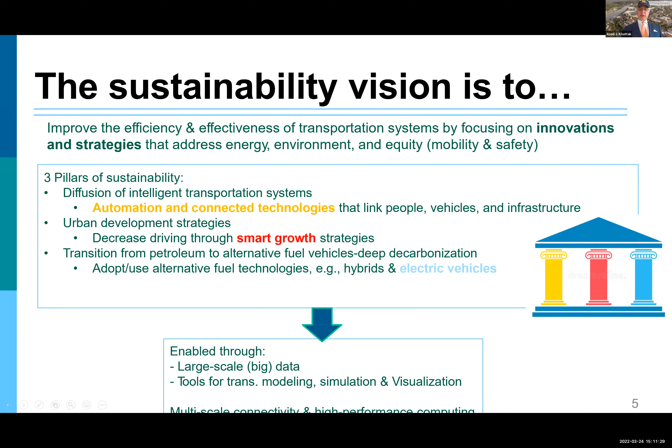This whole thing, the good part and the optimism part, is that we are able to now achieve some of our aims through large-scale big data, transfer of that data in very fast environments, and also through tools that are being developed for transportation modeling, simulation, and visualization.

So that's the good part, where I think we can rely on some of the new tools being developed, especially AI. This gives you the societal context and opportunities. Safety is a huge issue: about $8 trillion in 10 years would be the economic and social costs of harm from crashes, wastage of fuel and congestion, and fatalities. There are so many of them worldwide, about 1.2 million people die every year.

These are huge costs that society pays, from congestion and its economic costs, all turning out to be in the trillions of dollars. But at the same time, the opportunities are to improve our supply chain efficiency, improve mobility through innovative strategies, as well as enhance safety, better air quality, and enhance economic development.

The transportation system of the future — there's one concept of smart cities, which has been around for a while. This is the overarching idea where you integrate automation and connectivity of vehicles, but also bring in electrification and freight efficiencies, as well as commute and travel efficiencies. This is enabled by computational power, ubiquity of ambient sensors, big data, and artificial intelligence. We'll talk about that a little more.

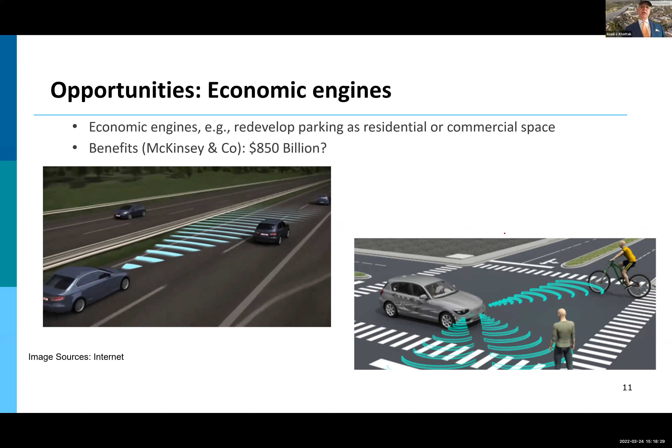The first one is that of CAVs, based on some of the reports I've read from McKinsey and Company. There are economic engines that can drive these innovations into the system, but is our system ready to receive these? That's the question. But the benefits of these have been estimated at 850 billion per year once these systems start to diffuse more and more into our system.

As you probably know, there are 5 levels of automation that SAE has given us, increasingly getting the car to drive itself. But we are usually talking about these systems in the commercial market, and levels 3, 4, and 5 are very high-level systems being tested, but not available at the moment, even though some car companies claim they have an autopilot that seems like level 3 or 4, where pretty much the car is driving itself.

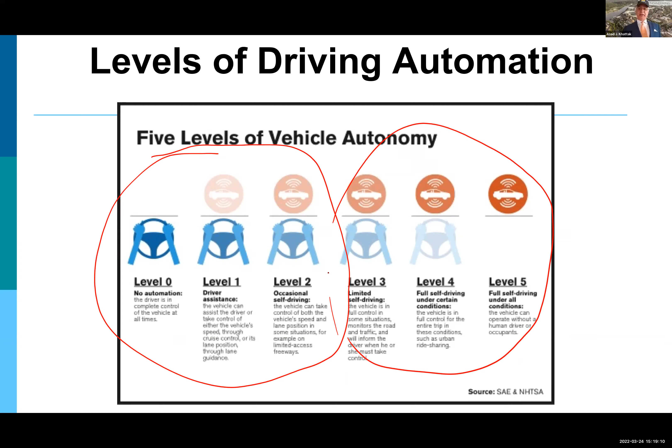One other important thing I want to mention is this degree of autonomy and cooperation. These are two things. You can have an autonomous unmanned military vehicle which doesn't talk to anything, and in a desert or jungle it can keep on navigating.

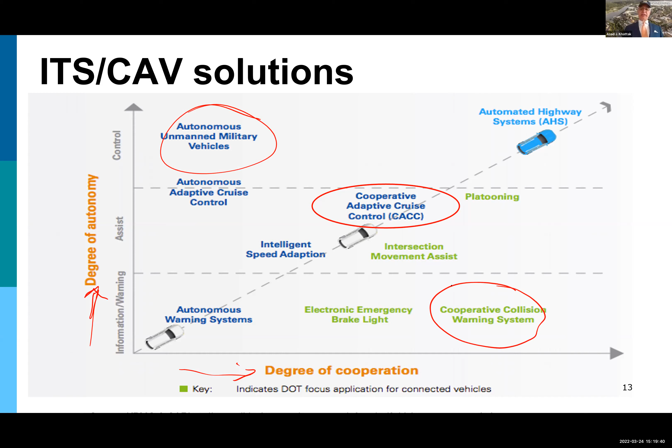But on the other hand, there are cooperative systems where you have the collision warning system and so on, all the way to automated highway systems, which were worked on in the 90s by various companies as well as universities. There was a demo in San Diego where they demonstrated the usefulness of them, but to implement them takes many more years.

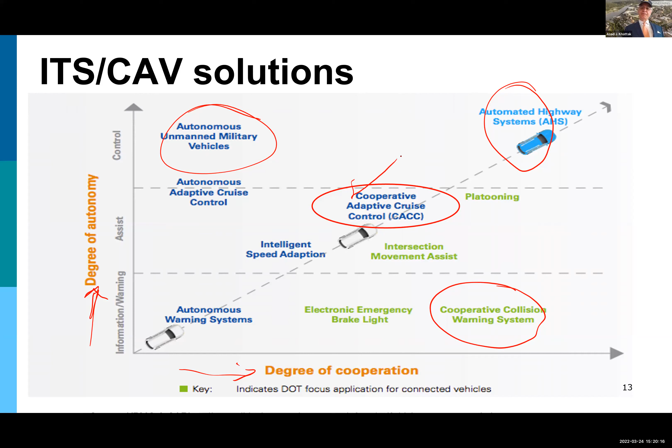So what I'll try to do is talk about maybe something in between, which is being tested and is closer to implementation. So in order to proceed, I wanted to mention this idea of driving volatility, which is kind of an overarching concept.

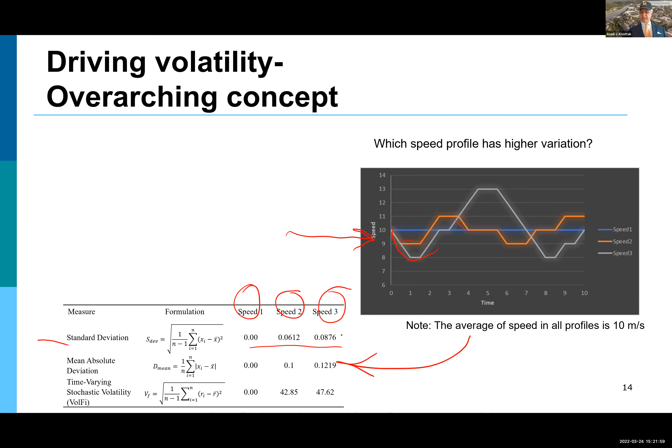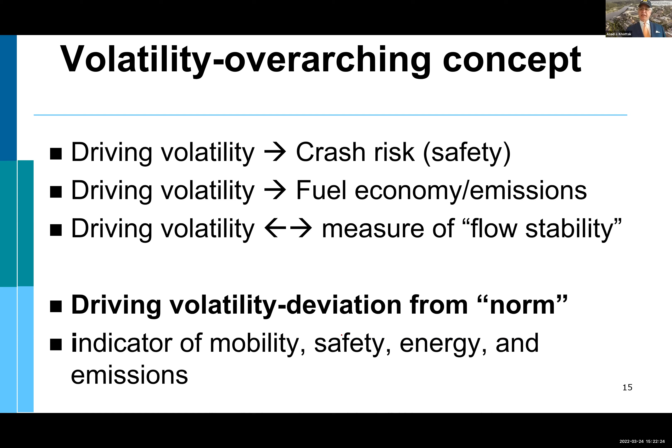So volatility also captures crash risk, like safety, but also it can capture fuel economy. If you are accelerating hard and braking hard, that means more fuel consumption. And also it can be a measure of flow stability. So it's basically deviation from the norm, and it's an indicator of mobility, safety, energy and emissions, some of the key criteria. I'll come back to this in just a little bit to show you some results.

And then rear automatic braking, where if you're reversing and so on, it is able to brake. In addition, rear view cameras are already reducing backing crashes. This is an important aspect - this is already happening in the system, and we are seeing insurance claims being used, and insurance rates for cars with these systems are lower. So this is clear evidence that these systems are effective.

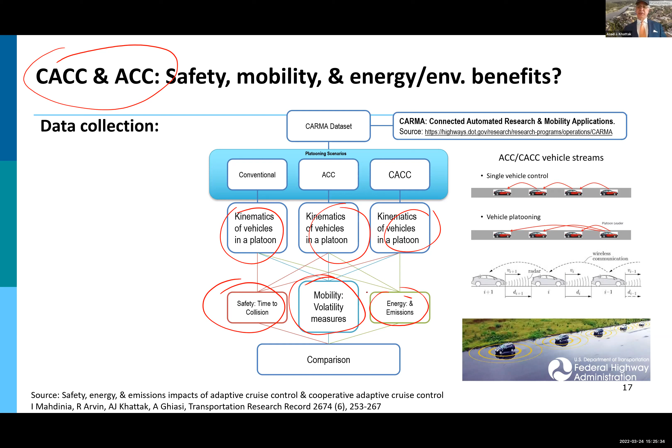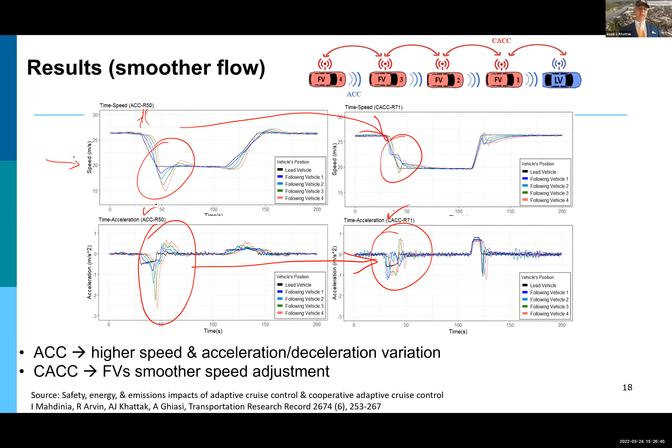When you look at the benefits, we quantified them, looking at some volatility measures based on speed. As you can see, that drops substantially. When we compare these measures of volatility in terms of stability in flow, we see a 19% improvement, ranging from 14 to 29%, depending on which car it is.

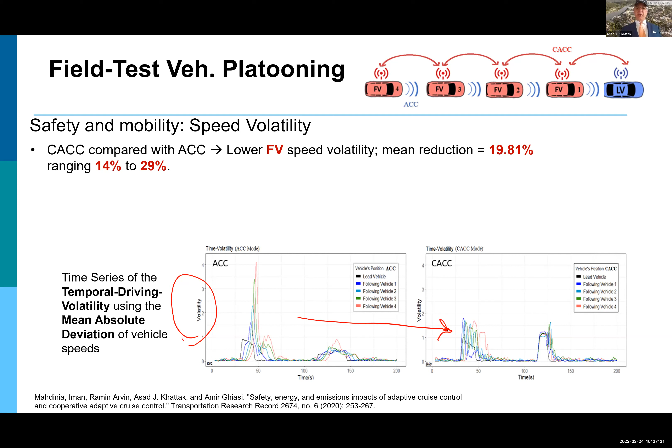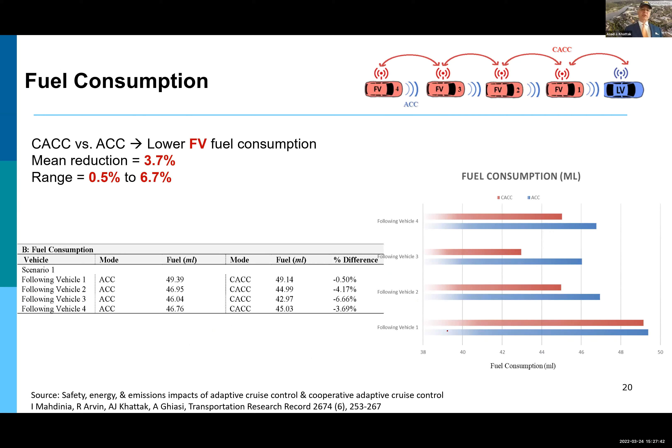For fuel consumption, you get better results if you have less volatility or less acceleration/deceleration. We found a 3.7% mean improvement, which can vary from 0.5 to 6.7%, and emissions would also be reduced going to CACC from ACC by about 3.74%. So this study pointed out substantial benefits in addition to what we're already getting from ACC - there are further benefits from CACC.

And as you keep going, like I was showing you, you go to an automated highway system, you get even more benefits, okay? So that's a good sign.

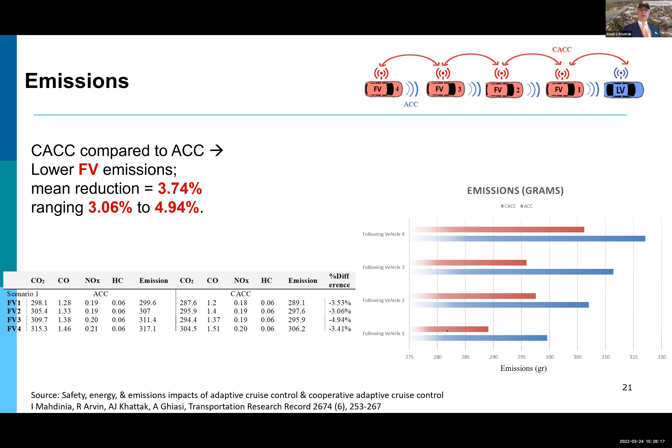One other aspect I wanted to mention was in a different study, we found that integrating AVs into the existing system is probably not so difficult. In fact, it might be interesting and easy to do. Actually, A&M had collected some field data, and it's an interesting experiment.

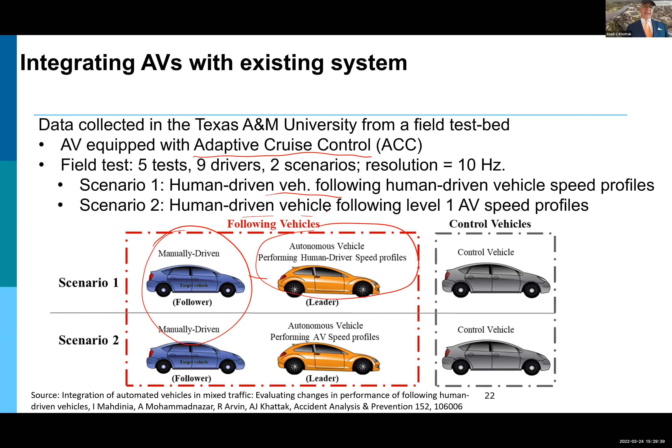We analyzed the data - basically they used adaptive cruise control, and looked at how a human-driven vehicle behaves when following a profile of a leader behaving like a conventional vehicle versus a non-conventional vehicle. They took some profiles from the NGSIM data set and simulated that - in one case it was driving more smoothly, in the other case it wasn't. Scenario 1 was human-driven vehicle following a human-driven vehicle, and scenario 2 was human-driven vehicle following a level 1 AV speed profile. We found there is lower driving volatility in terms of speed and acceleration, as shown here.

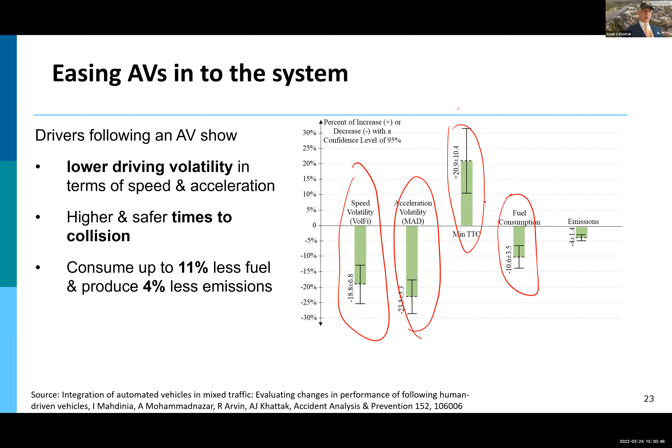So this will make it easier for these systems to be integrated into our system. Although initially we thought it's unclear how automation will be integrated, it seems that at least moderate levels of automation are better for the entire system, not just themselves, but there are benefits to people in conventional vehicles following these vehicles.

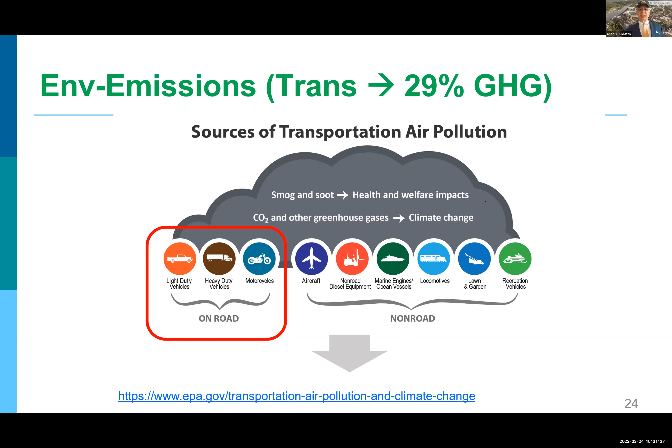Moving on to environmental issues, this is a big area. Of course, EPA is involved in some of the strategies for this. As you know, our system is very highly multimodal, but basically for on-road vehicles, we are interested in seeing how smog, soot, and also CO2 emissions, which lead to climate change, are affecting our system. About 29% of greenhouse gas emissions are due to emissions coming from transportation sources.

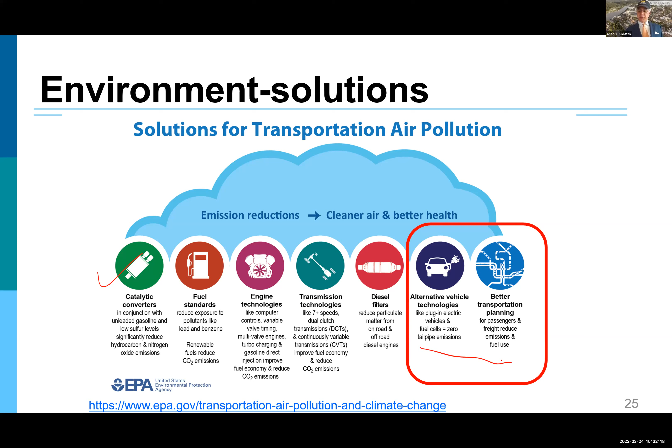This EPA website has a really good way of characterizing solutions. It ranges from catalytic converters, which I guess are being stolen in California, from what I heard on the news the other day, because they have some good metals inside. But anyways, there are a bunch of strategies to improve emissions, some being engine technologies, transmission technologies, diesel filters, and so on. We wanted to focus more on better transportation planning and also alternative fuel vehicle technologies, which are critical.

One of my colleagues, and like I was mentioning, policy is extremely important. He did study, Dr. Greene. He used to work at Oak Ridge National Lab and now works at University of Tennessee. He's basically an expert on policy, and he looked at the miles per gallon improvements for the CAFE standards. He says that since 1975, when these CAFE standards came into existence because of the embargo, we've saved about $5 trillion and avoided about 17 gigatons of carbon dioxide being emitted into our atmosphere.

The reason he's saying this is if you see this graph, the red line is for fuel consumption, and that has remained stable. But our vehicle travel has been increasing substantially. So the gap between these two represents how much benefit we have gotten, and that's this $5 trillion number when multiplied by the price of gasoline, and you can also put a price on CO2 emissions. This is an interesting way to look at it and quantify the impacts of policy over time, as shown in this paper.

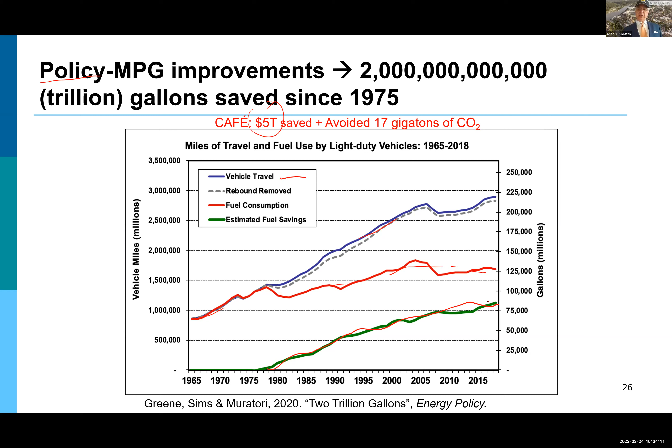Another point, other colleagues in California have looked at how transient driving, that is aggressive versus smooth driving, differ in terms of their CO2 emissions. If you are going at speed 40, the emissions are much lower, as you can see, compared to this. This is the difference between driving aggressively versus not aggressively, almost twice as much.

They use what they call VSP, vehicle specific power, whereby you can calculate how much emissions you get from the speed, acceleration, and also the vehicle's mass, which also captures the aerodynamic drag and the different types of resistances that have to be overcome by the vehicle. So anyways, the point is that smoother driving has huge implications for emissions.

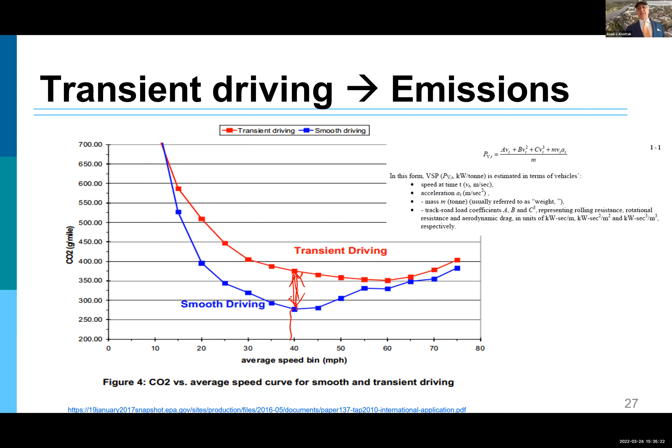Here's one of the studies that a student with me worked on, looking at driving style, published in Part C. It looked at how aggressive or calm driving varies across different contexts in different neighborhoods, and whether we can use naturalistic connected vehicle data to classify these driving styles. He decided on at least three types of styles: calm, normal, and aggressive. This would obviously be associated with the risk of crashes, more fuel consumption, and more emissions, but that's an interesting aspect of this.

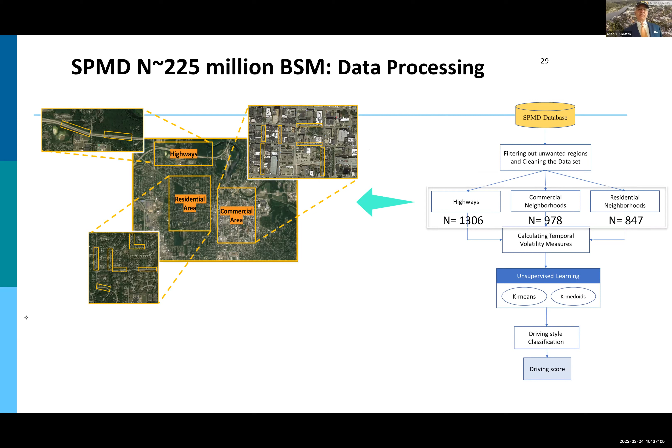We started with data collected in Ann Arbor, Michigan, under SPMD. This was some time ago, but basically collected basic safety message data, and we used that to process the data and look at different neighborhoods. There were about 2,800 vehicles, and over a 2-month period, we had data that had to be filtered and cleaned because it's a lot of data. That's from Michigan. We then divided the data into different neighborhoods that these cars had traveled in. Amin worked on how to classify these different routes, in terms of highways, residential areas, and commercial areas.

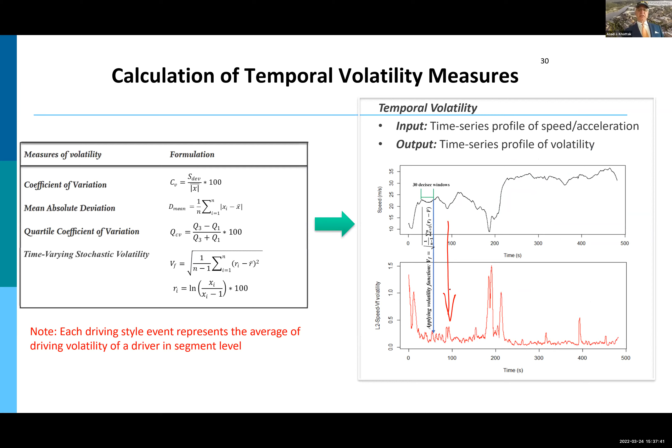He used unsupervised learning techniques to come up with a classification of different driving styles, and then a driving score that we can give to people so they could potentially improve it. We used the same idea of volatility, converting speed into a volatility index over time—these are temporal measures of volatility. Then he used a clustering approach, k-medoids and k-means clustering.

We found that indeed, as expected, we classified people into aggressive, normal, and calm. With aggressive driving, we observe high speeds, and acceleration and deceleration are higher, as well as other measures like coefficient of variation of speed and acceleration. As they become calmer, these measures become smoother and smoother in different neighborhoods.

For driver tracking and driver score, we used different methods. These are preliminary results showing aggressive drivers are aggressive 1.76% of the time on highways, but on other kinds of roads it might be higher, in commercial areas. We looked at how we can develop a number for driving style for highways—it will be different for local roads, but we can combine it. We can have a driver score based on the data, and over time it can be improved with new data coming in.

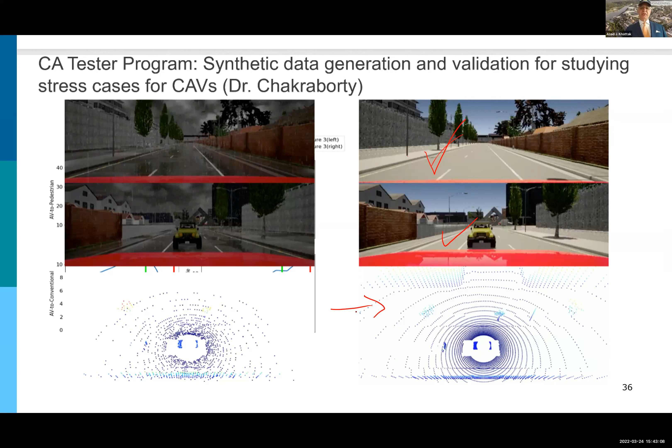I don't have too much time to go into all the details, but this is another piece of research we are doing. With that, I'll move to smart growth. How am I doing on time? Okay, I'll have to skip a few things.

Smart growth is another solution strategy. In the Hampton Roads area, a colleague and former student looked at what if in the future people were to settle in areas closer to roadways, more accessible and more compact, as opposed to being sprawled out. He found about a 5% decline in VMT, NOx, and VOC.

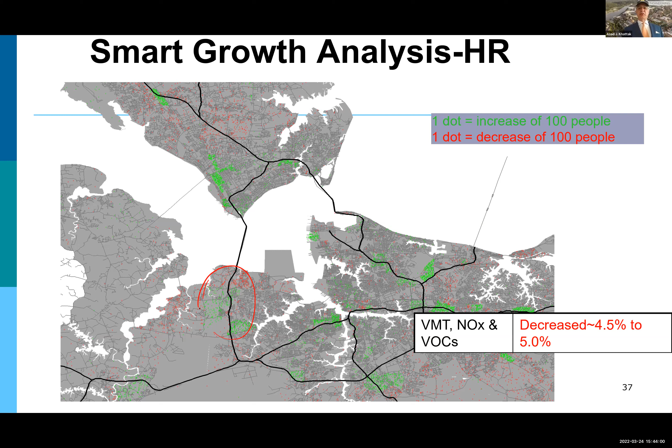But this model is not very sensitive to people changing their modes. We also looked at neo-traditional and conventional neighborhoods and travel behavior. Neo-traditional neighborhoods are defined by compact, mixed-use development, where people can walk to the grocery store and are better served by transit, pedestrian, and bike options, as opposed to conventional neighborhoods which are unconnected and lollipop style.

We tried to correct for self-selection bias, since people who live in these neighborhoods might be self-selected - they may just enjoy walking and bicycling, so they chose to live there. There's a statistical technique to correct for that. After correcting, we found that single family homes in neo-traditional developments make about 19% fewer automobile trips, and make more walking trips, which is healthy.

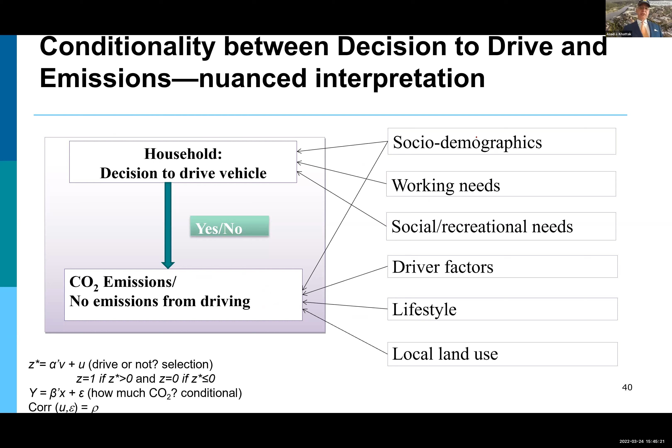In terms of emissions, we looked at the conditional decision of driving versus not driving, and given that you drive, how much emissions you produce. Using some data, we looked at how this connected with land use, and found that a balanced mix of uses - residential and commercial mixed together - is helpful, resulting in less emissions. Also, more connectivity shows that people living in those neighborhoods emit less.

We also looked at the Washington D.C. area's traditional transit-oriented development, and found that people travel much more by transit in those neighborhoods, although their total trips are more or less the same - but transit trips are more.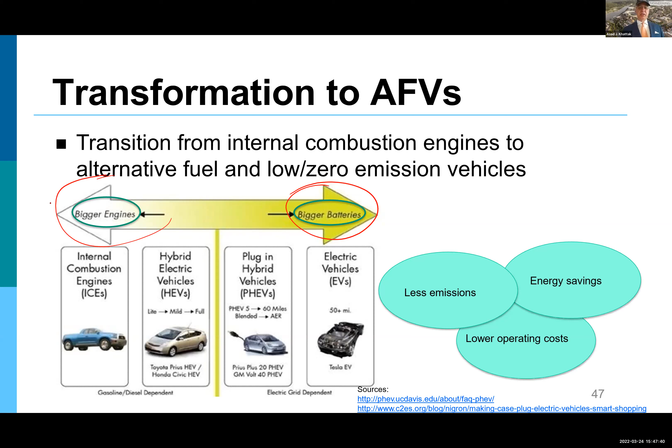In terms of transformation to alternative fuel vehicles, you go to bigger batteries compared to bigger internal combustion engines. This is a nice graph from studies Dr. Greene has done - you can get this information from fueleconomy.gov, a site maintained by our colleague at Oak Ridge National Lab. He's saying that hybrid vehicles, which have been around for about 20 years, have about 50% better miles per gallon on average, and greenhouse gas emissions are 33% less.

We just don't have good information about these options, but their market share is about 6.5%. Their MSRP difference is about $1,700 from a conventional vehicle. The payback - how long it takes to recover that cost - if gasoline is $2.50 per gallon, before prices went to $7 in California, and you drive 15,000 miles, it will take about 3.7 years to recover the cost. Although now it may take just a few months. There are also environmental benefits: fuel economy improvement of about 50%, and emission reductions of about 33%.

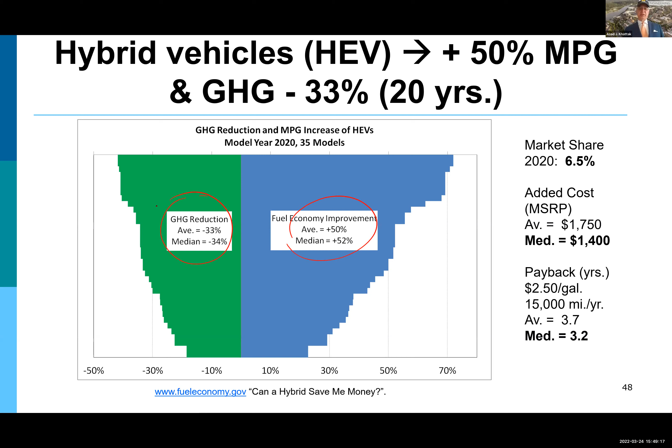We are looking at this with one of my colleagues at Oak Ridge, using the National Household Travel Survey to analyze what kind of AFV impacts we may be able to study - these early adopters of AFVs that might be contributing positively to the environment - but we are looking at how those adoption decisions are made. This is a paper we developed some time ago, looking at large-scale behavioral data as well as vehicle trajectories.

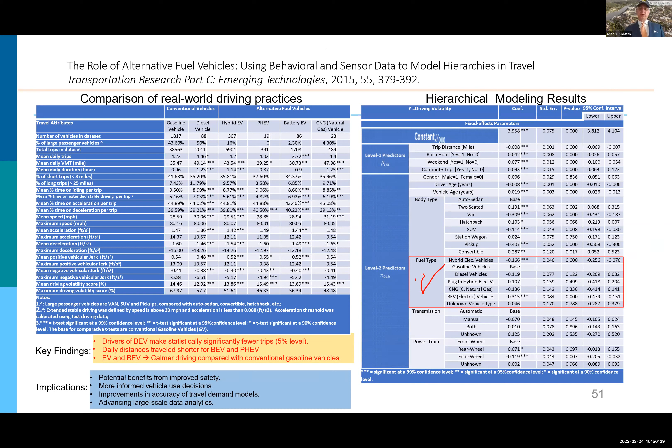There are these hierarchical models that we've estimated to try to understand the relationships between different vehicle types, fuel types, and travel. Here are the key results: daily distances traveled are shorter for battery electric and plug-in hybrid electric vehicles. Drivers of BEVs make statistically significantly fewer trips, and they are calmer drivers versus gasoline vehicles.

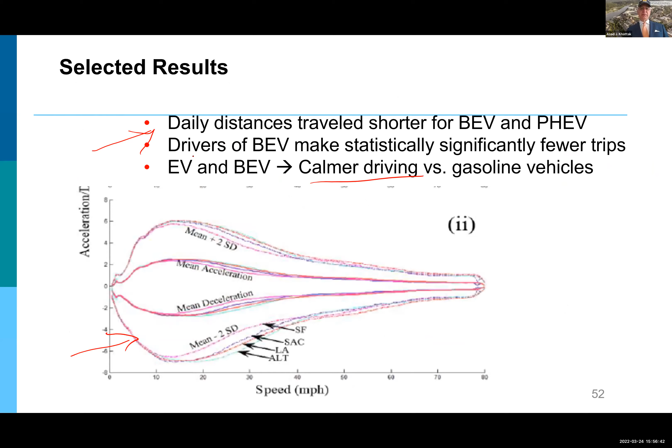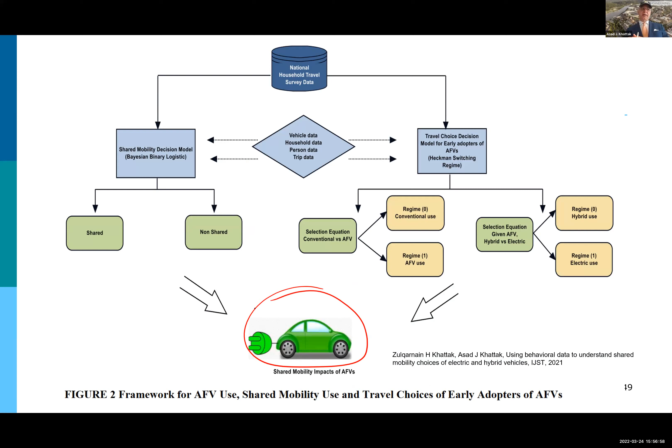Let me see if I can pull this up. Yeah, this—I didn't go into the details of it, but this shared mobility is extremely important, I think. And we are looking at how shared mobility, automation, connectivity, electrification, and shared mobility can all come together.

So I think that pretty much summarizes what I wanted to say. We need to be able to constantly assess our readiness for absorbing these technologies and ingesting them. And I think we just have a lot of good work to do. So thank you, appreciate it.

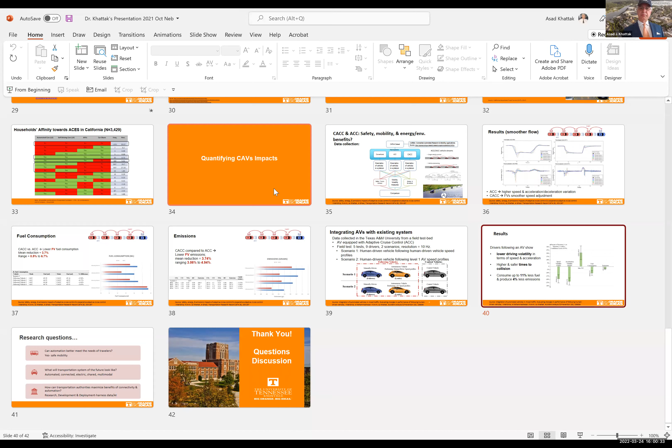Let me see if I can stop sharing and reshare the screen, which hopefully has an answer to your question. It's gonna take me a little time, I guess. Sorry, let me pull it up. Yeah, I got it.

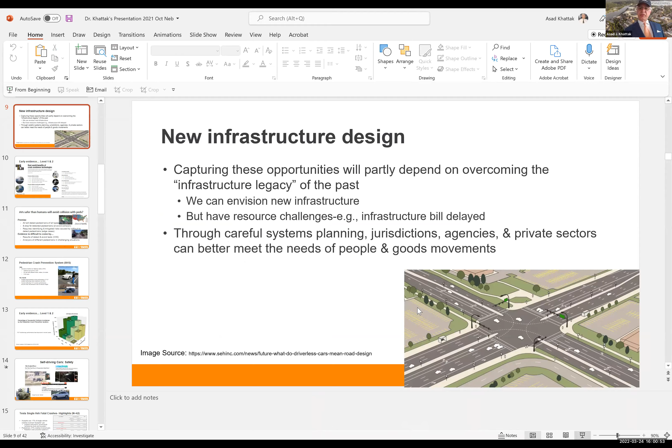So this graphic is going to show us a partial answer. So you see my screen, right? So Alex, this shows that we may need less infrastructure actually, because it's showing that automation can lead to more green infrastructure. That is, you don't need that much capacity because these cars are all automated, and therefore we can reclaim this infrastructure back from use by cars, because they drive closer to each other than in a non-automated system, and we need traffic signals and so on at intersections, but they probably can do it without any traffic signals and stopping and so on. So does that answer a partial question? Yes, there is some concern that we may not be heading in the direction of smart growth, being stymied by this need for infrastructure, but that need for infrastructure is going to be less, I think, rather than more. So in that sense, I see it as a positive, if that makes sense.

Yeah, I think I see that. And there's the million-dollar question of whether switching to AVs will affect people's choice of living location, like how far away they are from work. And that, I think, is going to play a big role as well. But we have no idea, essentially, on that one.